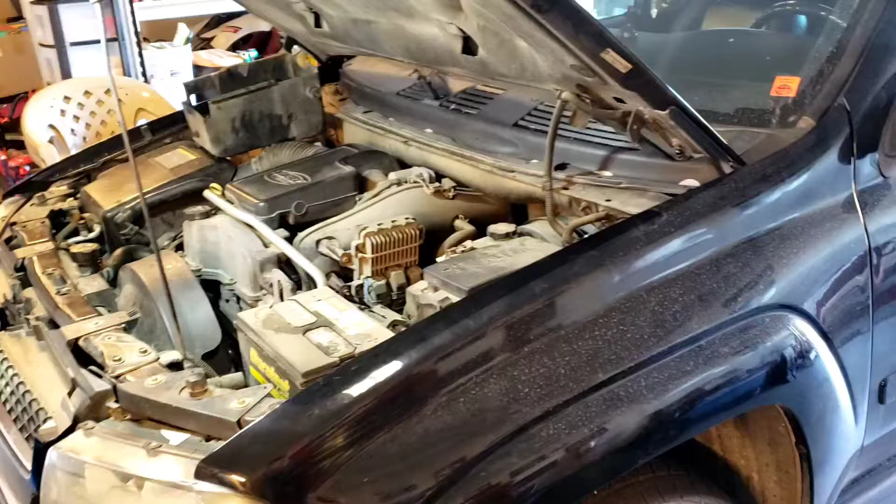Working on a 2007 Chevy Trailblazer with the 4.2 engine. Issues with this one, it has a really weak crank. I believe it's due to the battery. Weak battery. So we're going to do some real quick checks on it and show you what I check for. Make sure the charging system's working correctly.

But I'm going to try to start it here. I already started it once, but if it sits overnight, it'll barely even start, if it'll even start. So you can hear it's very weak right there. If you look, the charging voltage is really high right now because the battery is weak. So I'm gonna go ahead and shut it off.

But if you heard it there, I don't know if the video captured it, it barely cranked. And it's not that cold in here. It's probably like 40, 50 degrees in this garage. But when it gets down to single digits or teens, this thing won't even crank. It'll just click.

So what I want to check for is to make sure the alternator is working correctly, charging. There's no parasitic draw on the system. Check the battery, battery load test it. It looks like it's a battery, but I'm just going to show some of the stuff that I check for so we don't throw parts at the job, and we'll go from there. We'll try to start it one more time after it sits a little bit. You can try to listen to it again. So again, it's pretty weak.

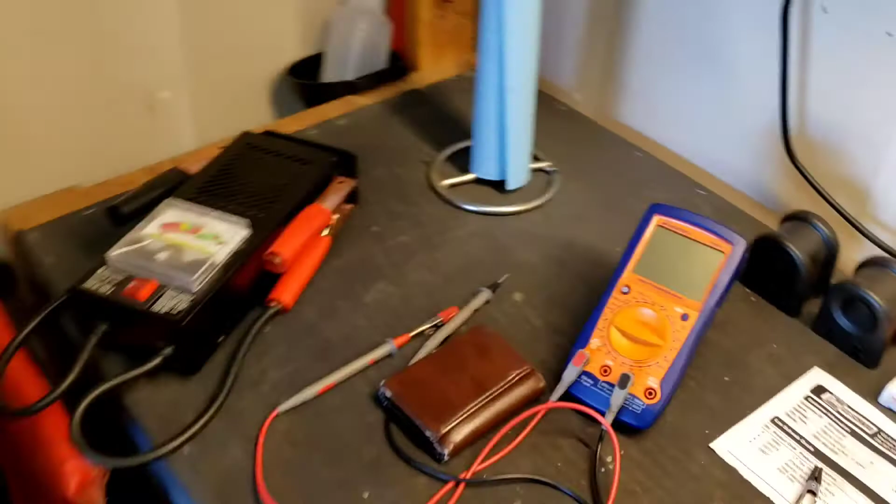So now what I'm going to do is hook up an oscilloscope. The reason I'm using an oscilloscope is so I can hook my amp clamp up and read amperage. You don't need to do all this, but depending on what kind of fault you have or charging system you have, you may want to do that. But you can also use just a regular DMM, digital multimeter. But we're going to hook up the oscilloscope and do some checks.

So I got my leads, battery positive, battery negative. There's a little corrosion on those connections, so I cleaned all that up to get a good reading. So you can see the waveforms all over. Why was that all over? Because it was running and then I turned it off and modules were turning off there. So right now everything's off. Still a little bit all over because modules are turning off.

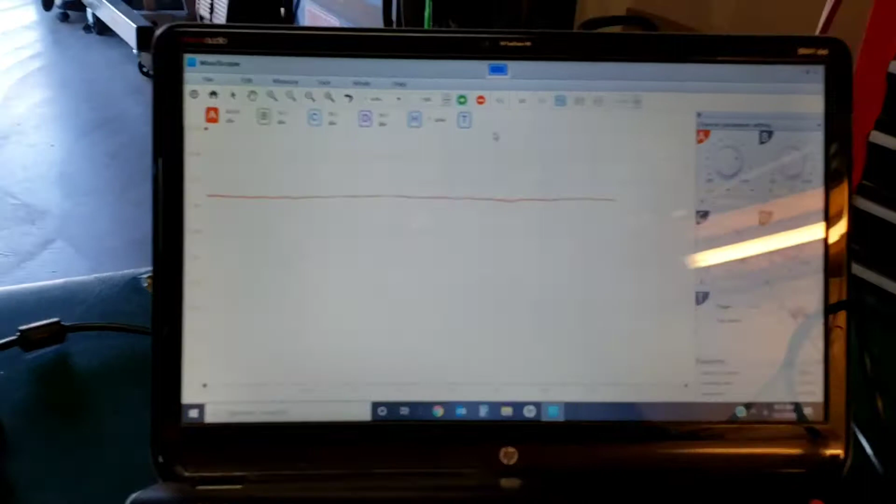But if I bring my cursor down and put it right on there, I got 9.8 volts, 9.810 volts roughly. That's very weak, right? That's why it barely starts. I'm surprised it even starts. It's supposed to be 12.6 volts because there's 6 cells at 2.1 volts apiece. 2.1 times 6 is 12.6. That's a fully charged battery.

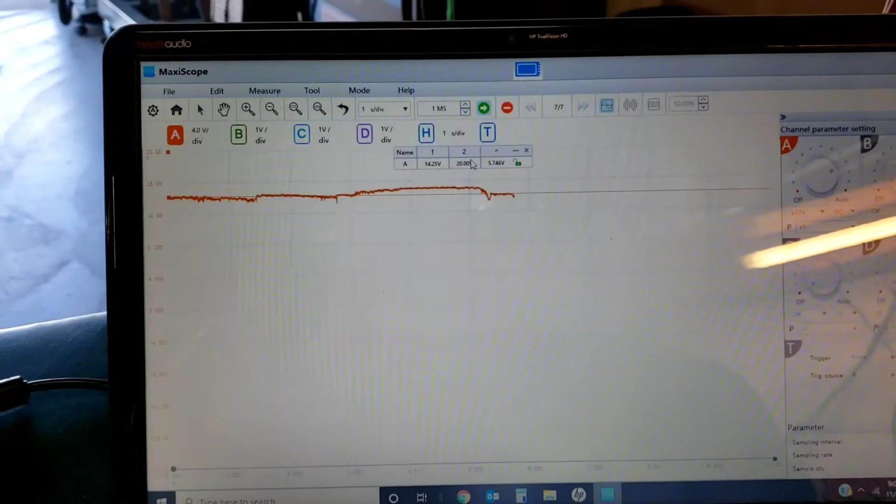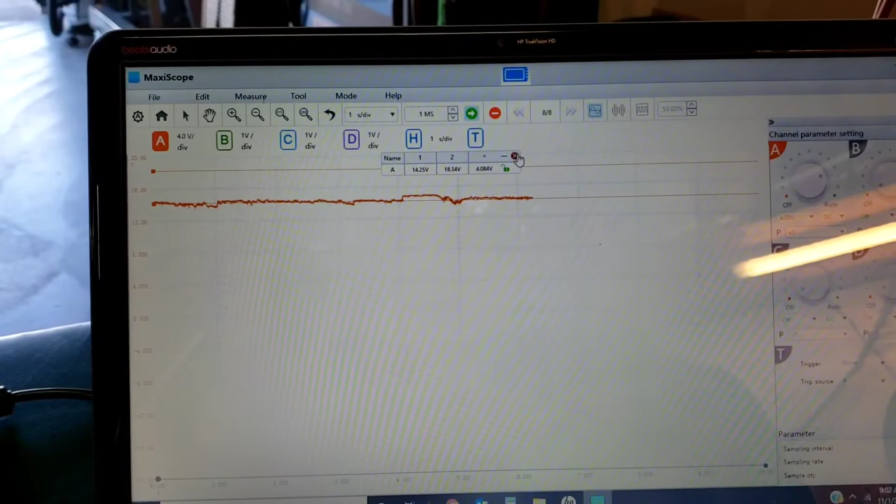So now what I'm going to do is go ahead and start it and read the alternator output. Hopefully it starts again. So it's running. You see the alternator, we're charging at roughly 14.25. It goes up and down. Hang on. Got the cursor out of there. 14.6.

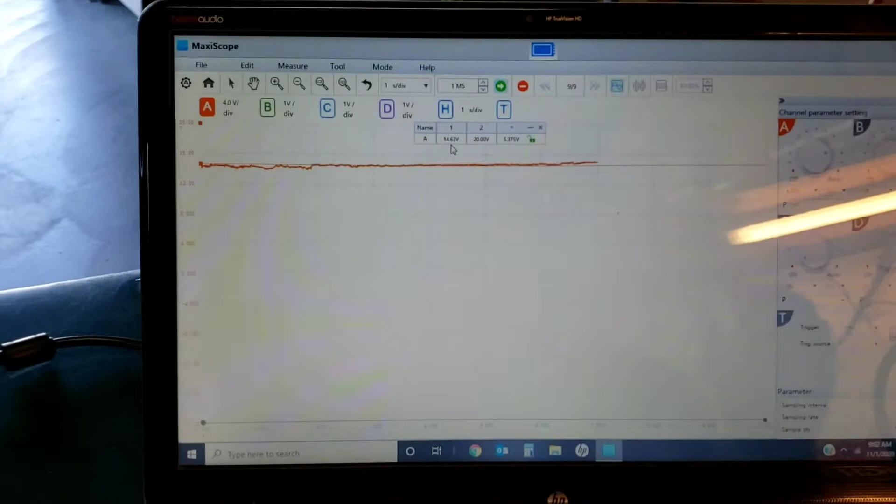There's a voltage regulator built in there. Obviously it's going to be higher voltage now because it's trying to get that battery back. It knows the battery's weak. There's also, on these Chevys, an amp clamp from the factory that's built around the cable to check amperage going through. So the alternator is charging. You can see it just went up there. If I pause this, go back a frame, 15.15 roughly. It's not overcharging, it's just that the battery's that weak.

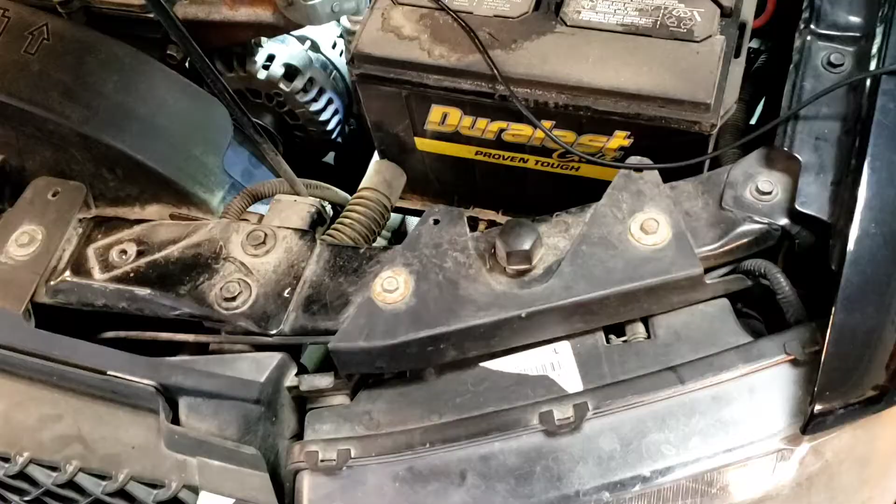So it's charging, the alternator's working correctly, but what we're going to do now is go right off of the alternator post that goes to the battery, and we'll do a check there and see if we get the same results. Alrighty, so I got the negative lead on the battery, the positive lead on the back of the alternator. So now I'm going to hit play on the scope again. Actually, it is already playing. So if you look now, I got, let me see where I'm at.

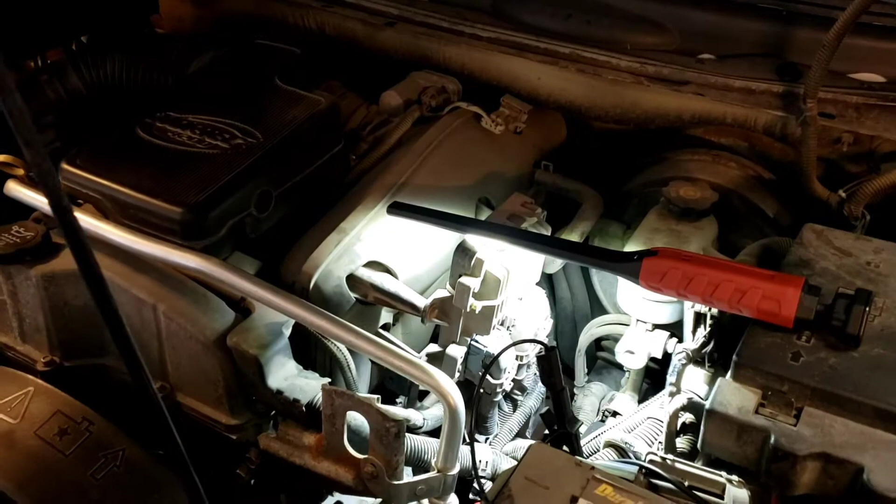12.4. It's got a little surface charge on it from running, but we had like 9.8, 10 volts earlier. I don't honestly think it was that weak, because if it was, it wouldn't even crank over at all. I just think I had a bad connection on these connectors here. Now I cleaned it up more, I got a better connection. But it's obviously still weak for that battery.

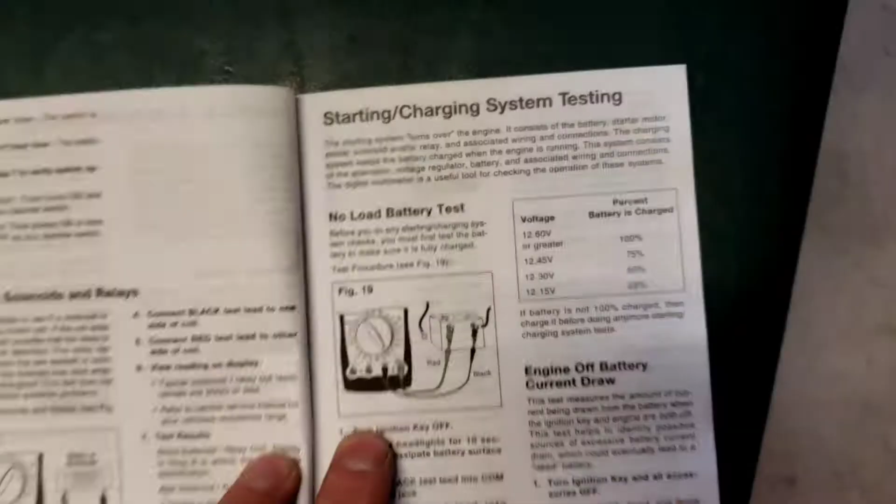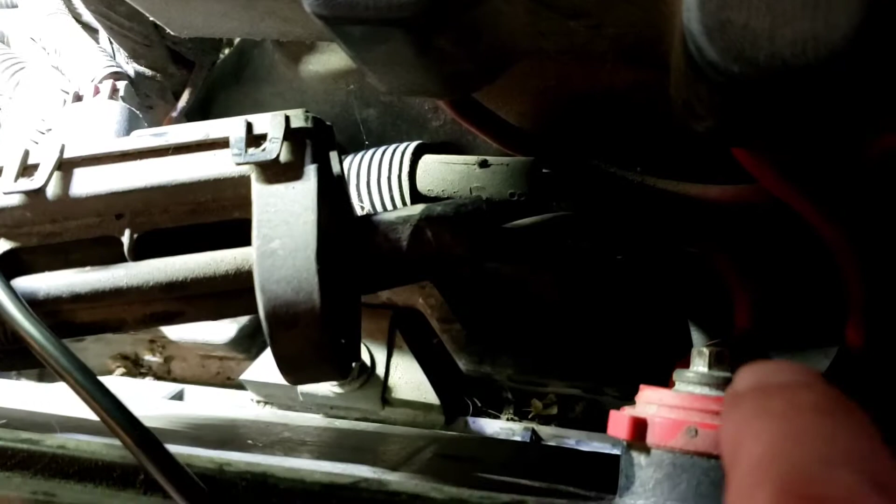If you look at this chart here, 12.6 or greater is 100%, 12.45, which is what we were just at now, 75%, 12.30 is 50%, 12.15 is 25%. So obviously if we had 9.8, 10 volts, it would have never started. That was just because I had a bad connection, because there's a bunch of corrosion on this connector there, and you can see it. So we'll clean those up when we do all this. But now we got a better connection, so that's more realistic.

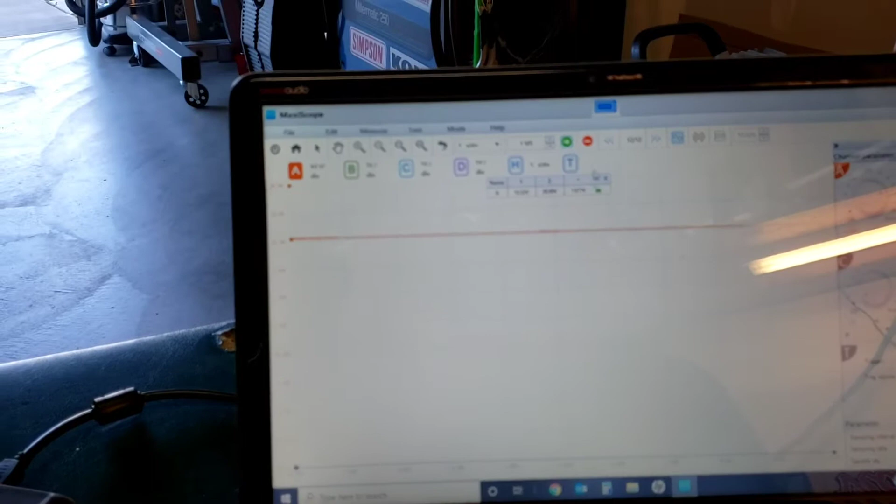So I just wanted to show that correction here, that before we had, you know, 12.3, 12.4 volts, obviously, so we could at least start the vehicle. But right now we have, yeah, 12.3. So obviously it is weak. So now we'll do the same test with it running and check the output voltage off the alternator. Let's go ahead and start it again.

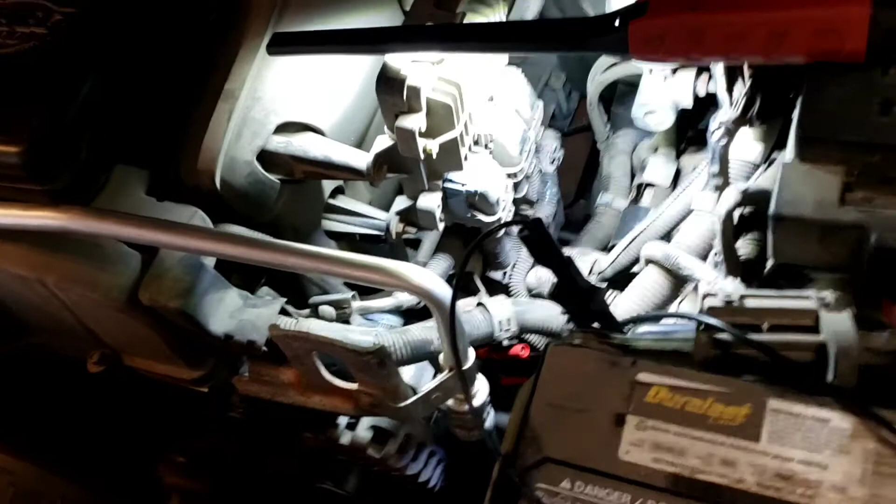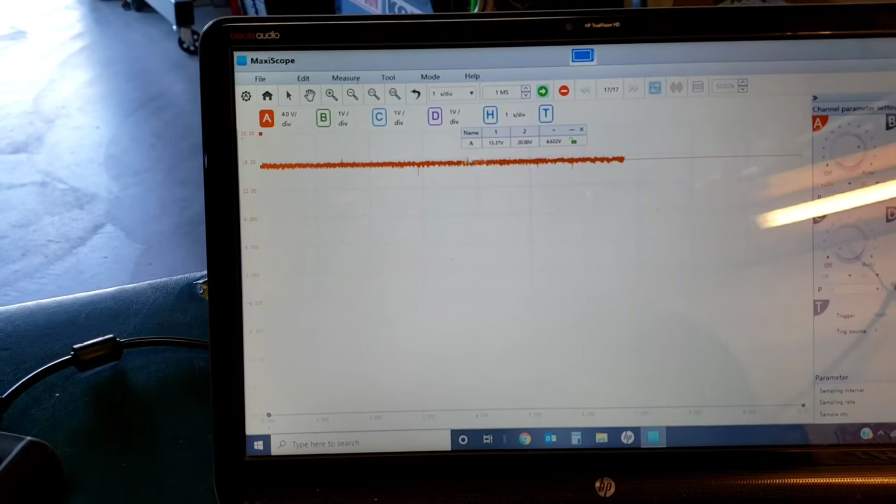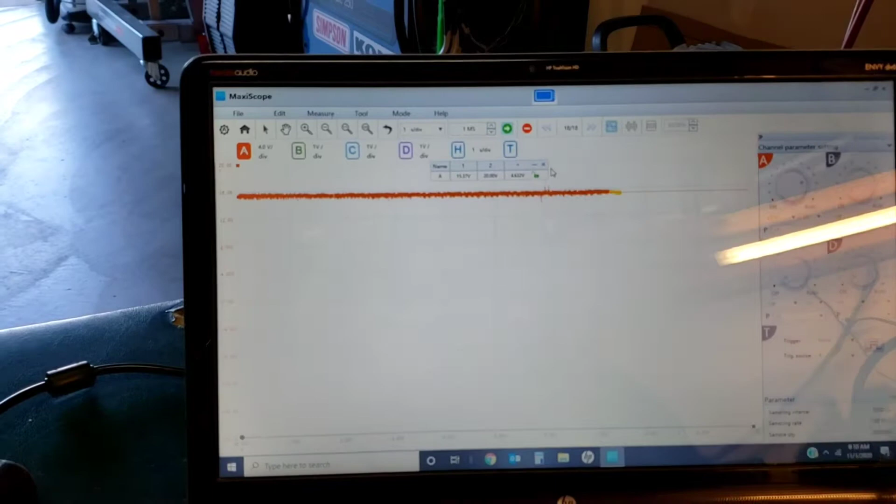Go back over to the scope. Negative and positive leads hooked up, negative to battery negative, positive to the positive post of the alternator. You can see there's some hash in there. We can put a low pass filter, not really worried about that right now, but it's charging. You put an average right down that hash, you're getting 15.3 volts, which is kind of what we got earlier, 14.8, 15.15. The reason is the battery's so weak, it was trying to charge it back up. So we know the alternator's working correctly.

So I went ahead and cleaned both those posts up some more with the wire brush. Everything's off, but now you can see it's actually reading correctly. I mean, the battery's weak, obviously, but if I put this cursor down here and line it up, we got 12. I just bumped it. Come on. Yeah, 12.17 roughly. Obviously the battery's getting pretty weak. Probably got a little bit of corrosion there too, but the battery's weak.

So now, we know the alternator's putting the correct voltage out. We know the battery is weak. We can put an amp clamp on here just to see the amperage, make sure that's reacting accordingly when you turn lights on and so forth. And then we can do a battery load check, and obviously we already know the battery's bad, but we can do some other checks. Depending on the charging system issues, this could help you identify some charging system faults.

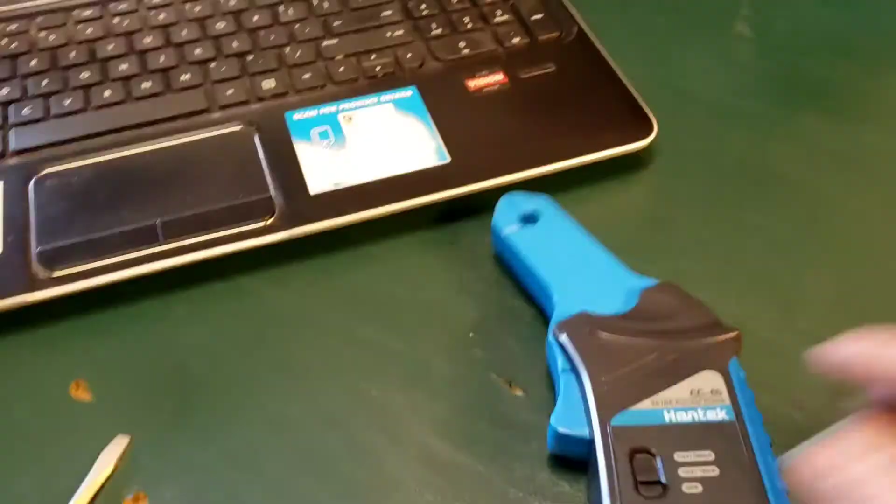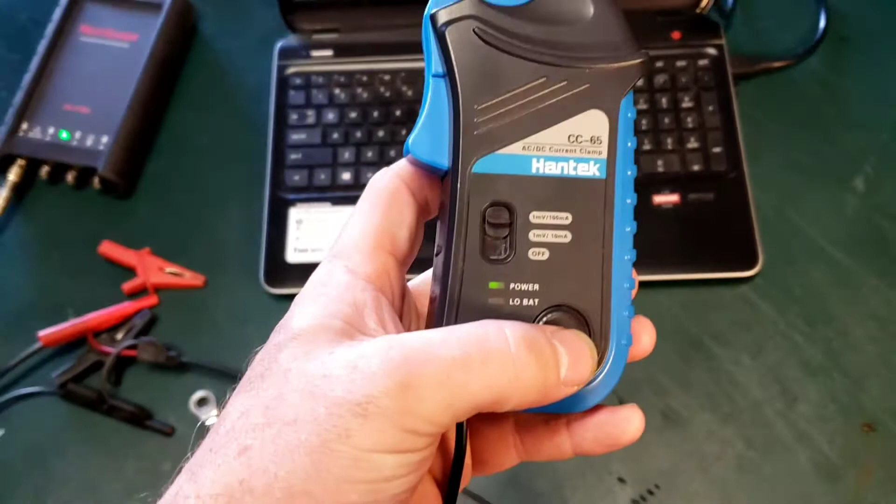Alrighty, so now we're going to hook up the amp clamp. We just got a low amp clamp here. I got to go into my oscilloscope settings and pick here. Where'd it go? I'm trying to film and click on this. That goes up to 20 amps. We'll see if that's enough. We'll go to 20 amps. Hit play. It's at 0. Take our amp clamp. We'll turn the switch on here. Like stuck. So we went to the high setting, and then I'm going to hit 0 on here. That'll zero that out on the screen.

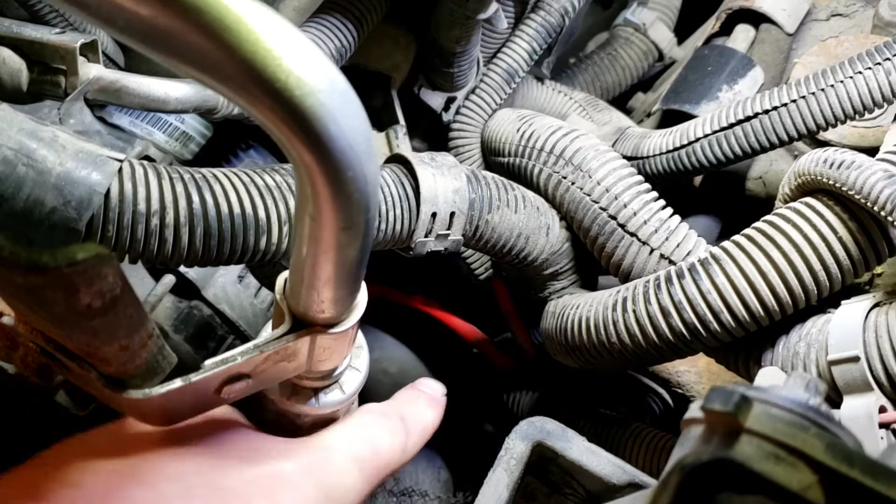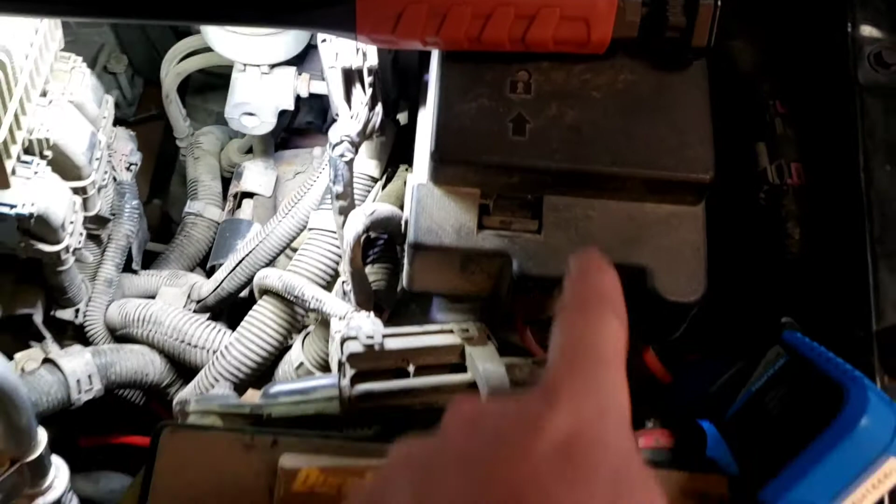And then we're going to take this amp clamp, go around that red wire down there, which is right from the alternator to the battery in the charging system, and check our amperage. All right, I put the amp clamp up here. I had a hard time getting it down there. I mean, I can move some wire sheathing and stuff, but I put it up here because what happens is the alternator charges the battery, tees off, and it powers the power distribution center or the fuse box. So it's going to be the same readings. So we're just going to go off that wire right there.

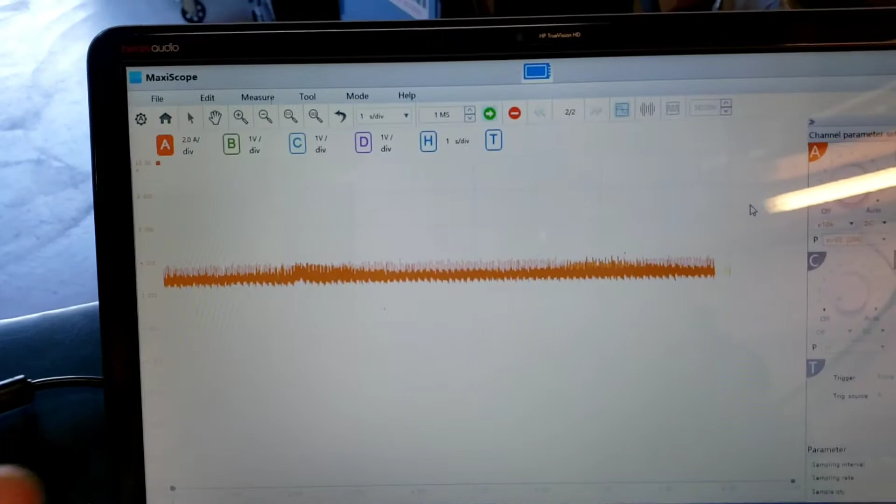So I have to flip my amp clamp around only because of the way the current flows. So if you look there now, I got average between 2 and 4, about 3 amps. It looks like powering it up. Now we're going to go ahead and turn some lights on.

I did get the clamp position right off the alternator. I had to move some stuff around, but I got it to work. I got the lights on, the heater on, the defrost on, the flashers on, put an electrical load on the system. And you can see our amperage is still not very high, it's like 3, goes up to 4 sometimes. And then you turn everything off, it shows only 1 amp.

for probe. There's a CC65, there's 2 of them, a 20 amp and a 65 amp. That's the small amp clamp I'm using right there. If you have a CC650, you go to 200 or 650. That's the bigger amp clamp, which I have right there. But I set it up here in the computer correctly. So I'm using the 20 amp. I don't think it's going to draw more than 20 amps in my scaling.

But on this, the first one is 1 millivolt is 100 milliamps. Second one's 1 millivolt is 10 milliamps. I need to set it to 1 millivolt 100 milliamps, or 1 millivolt 10 milliamps. But I had it set to this one up here. This has got to match that, basically, is what I'm trying to get at. So I had that set wrong. That's why the amperage was lower.

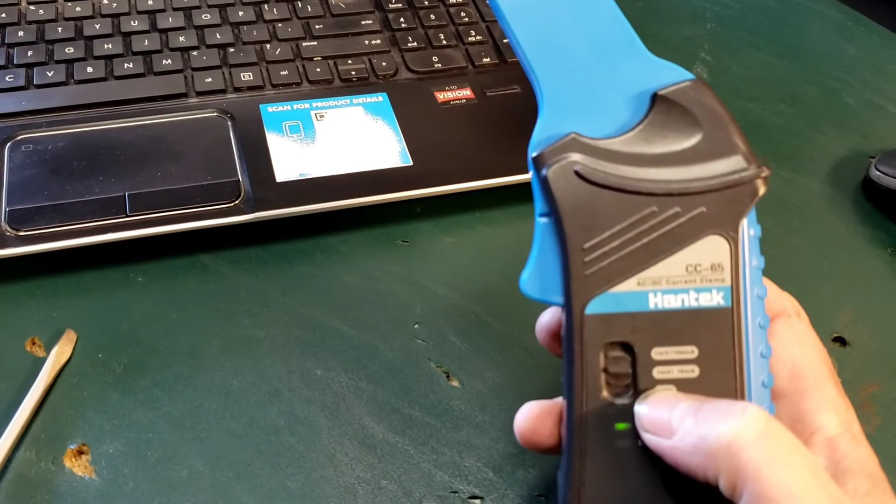Yeah, we could have done the math and all that, but now that I got it set right, I'm going to turn this off. Before I went 1, 2 all the way up, but I need to go 1 up. And then I'll zero it again like I did before. Now we'll have the accurate reading. So let me put it back on there and do the same test again. We'll go ahead and start it again.

Obviously this just proves if you have your equipment set up wrong, you could be chasing your tail. I almost went after an alternator there, because if it was really pushing that low of amps, I'd be like, well, that's why it's not charging the battery. But I had my equipment set up wrong, so always verify, whether using a multimeter, DMM, or whatever you want to call it, that everything's correct. It's the same thing with the battery posts. They were corroded. You always want to verify your readings because you'll be chasing your tail otherwise.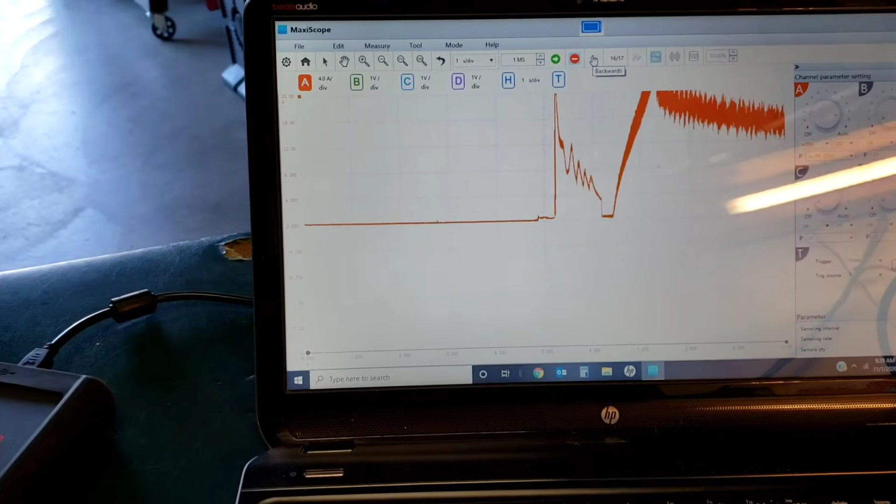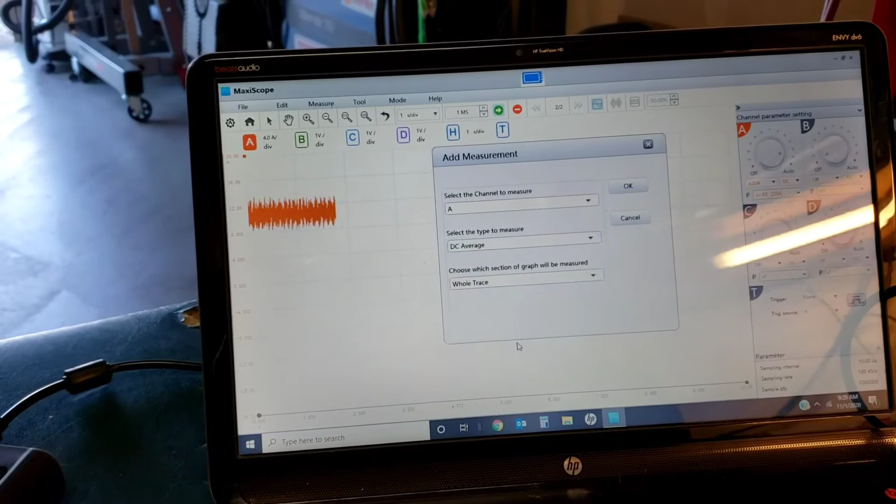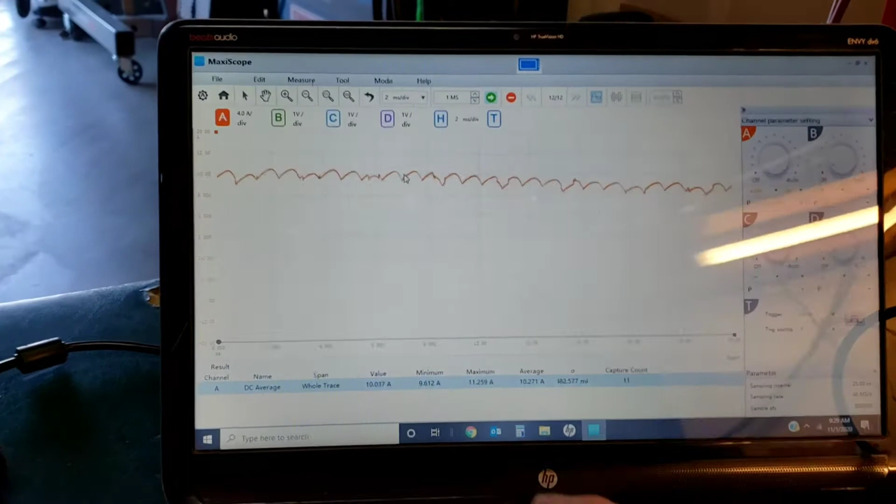So we got all that fixed up. Started again. It's starting better now because we've been running it quite a bit. Got the amp clamp on there. And let me pause it. So you look, it went way over to 20 amps there when I first started it, the spike, but now we're averaging 12 amps. I could put a measurement in here. Now let's take our time base, move it faster. So our average DC is 10 amps right now, right?

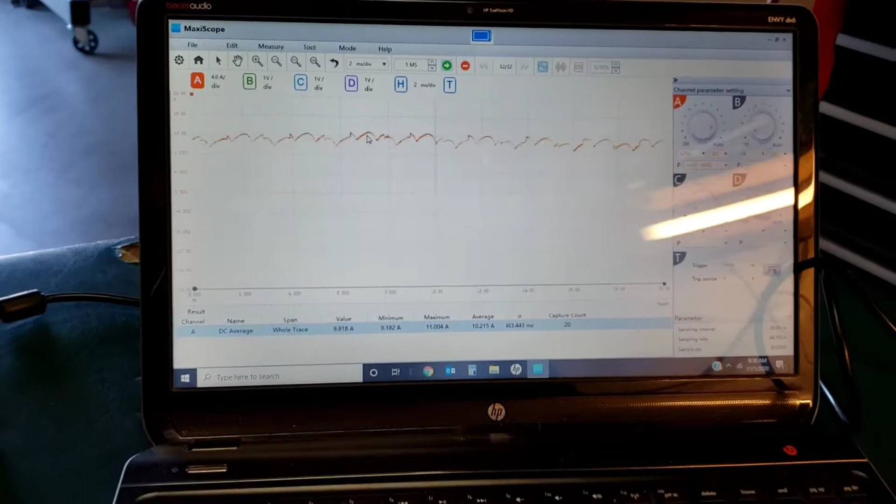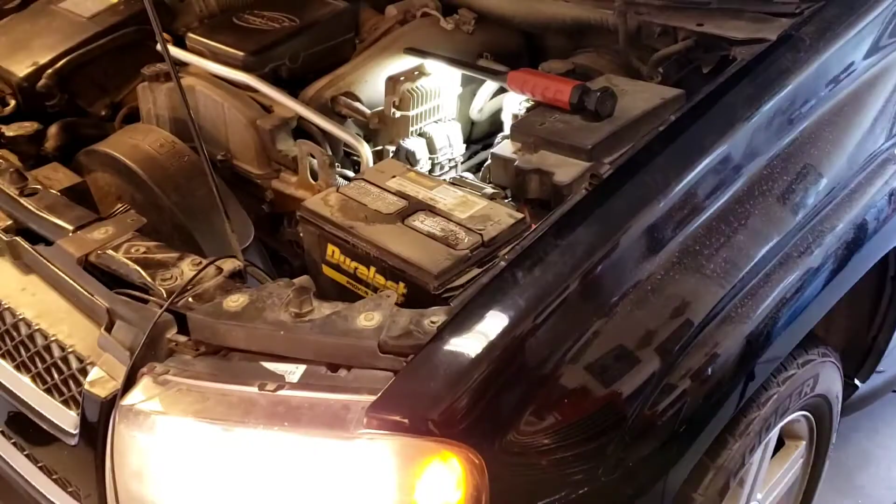So let me go ahead and turn the lights on and put a load on it. Right now, not much load on, we're drawing about 10 and a quarter amps, which is a lot better than I had before, just because I had my setup wrong. So that's normal. Now let's put a load on the system, and that should increase. So I just turned the lights on, and if you look there, the amperage went up. We're at 13 and a half, from 10 and a quarter to 13 and a half. Now we'll turn some more loads on and see where we're at. Now that's the average, obviously.

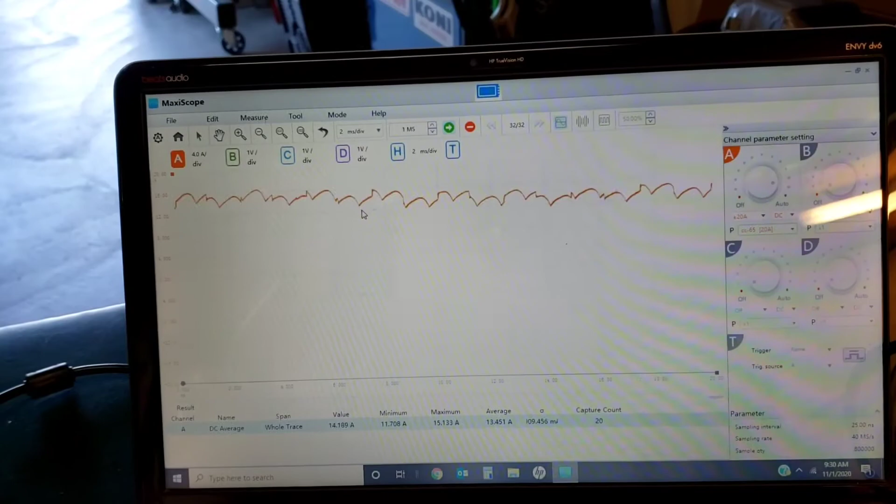So now I have the blower motor on, the flashers on, the rear defrost on, but I'm gonna have to rescale it now because this is telling me that it's going over my 20 amps that I have it set to. That's why it's not reading down there. So I'm gonna redo my amp clamp, put on the higher setting now. So I picked a higher setting, the 65. I'll go all the way up. Button's like sticking, I gotta fix that. There we go. And then I'll zero it.

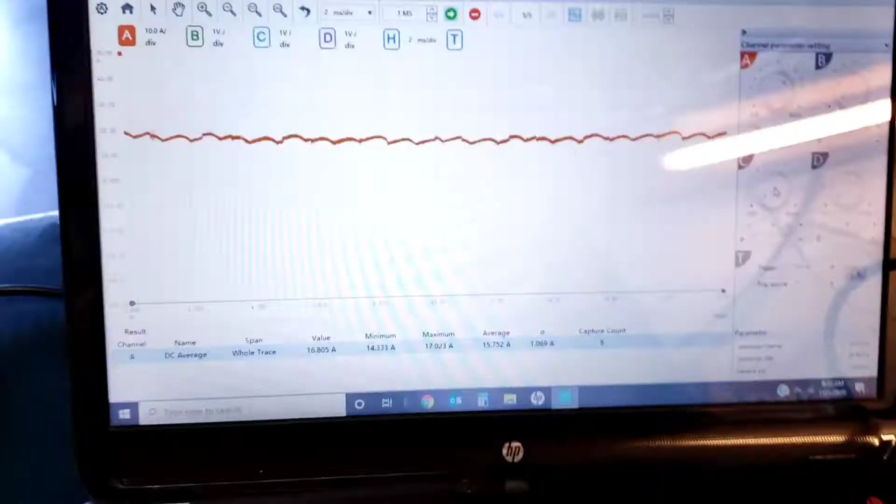Run a 2 millisecond per division time frame, so it's hard to see if it's zero. But if you zoom in, it is zeroed. I hook the amp clamp back up. Alright, amp clamp's hooked back up, and I'm on the higher scale. I got 65 amps on this side. But now we're drawing, once it focuses here, 17 amps, right? With the load on it.

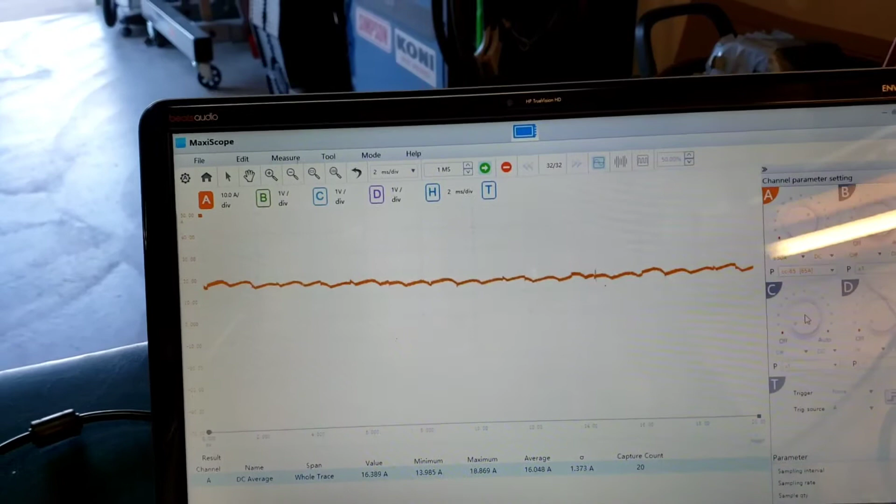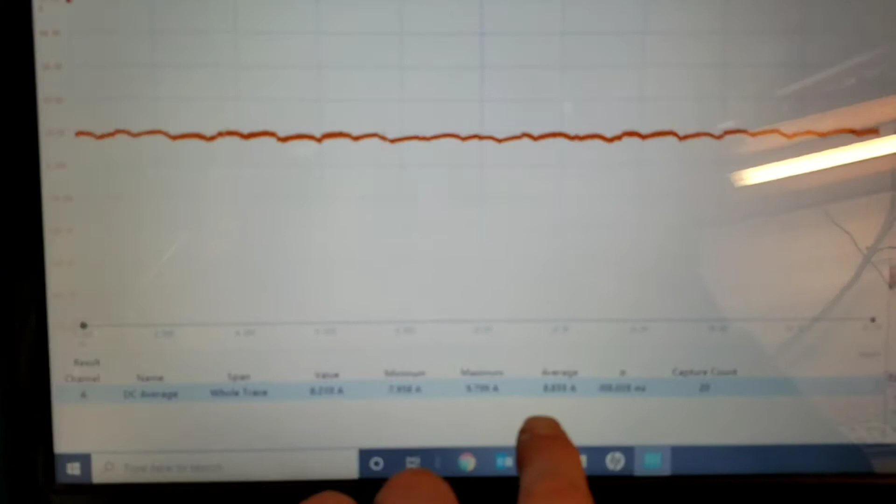Now let me turn everything back off again, let the engine continue to run. I turn the lights off, the flashers off, the heater off, and the defrost off. And now we're back to, once it focuses, about 9 amps. So obviously the demand is matching everything. So the alternator is working correctly. Obviously if you put more electrical demands on it, the more amperage it'll be. So that all checks good.

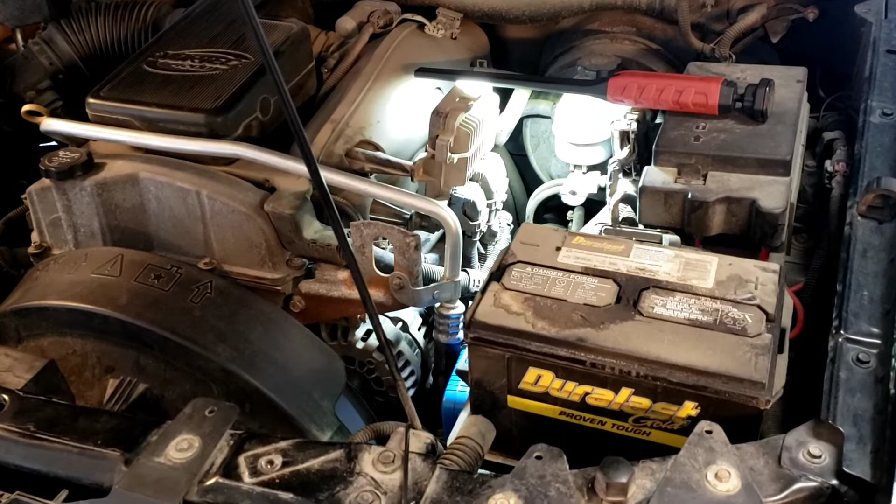So what I want to do now is, I know the alternator voltage and amperage is good. That's putting out, so the alternator's good. The battery's weak. We know that. What I'm going to do now is 2 more tests. A parasitic draw test to make sure there's no draw on the system when it sits overnight, and then a battery load test, and then that'll be it.

So now I'm going to do a parasitic draw test. Doors are shut, the hood's open, but there's no light on this hood. And typically, the general data is no more than 100 milliamps for a parasitic draw. But most, if you go into the service manuals for vehicles, they say 30, 40, 50. I know, like Mopar for Jeeps anyways, it's no more than 30 milliamps of draw. Because if you have more than that, if you have an amp or half an amp, you can do the math and figure out how long it's going to take to kill your battery. So make sure there's no draw on the system.

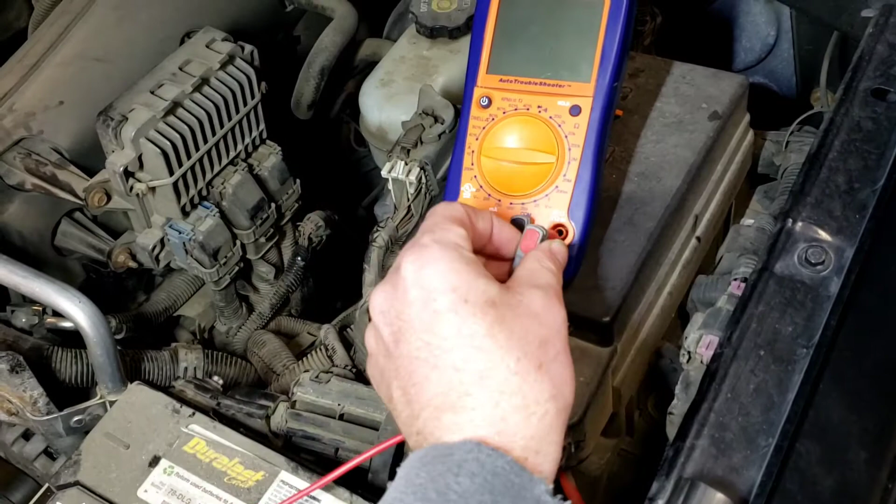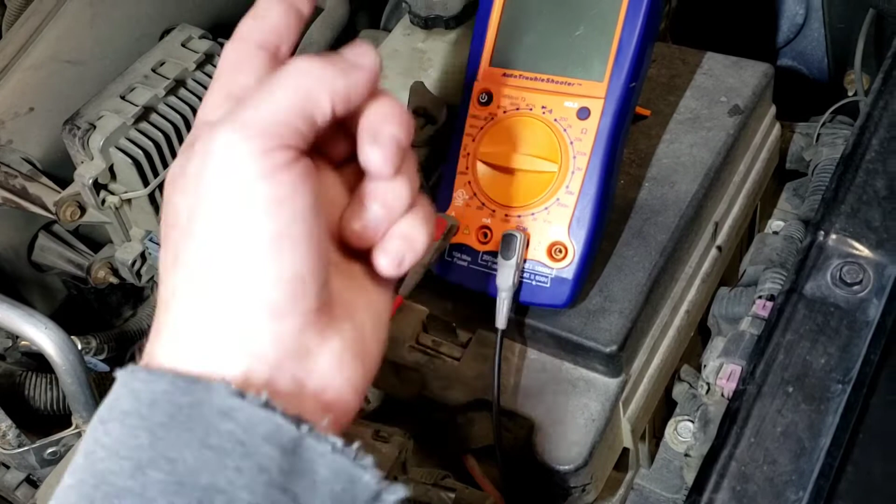So you can unhook the negative battery cable. You can go with the positive, it don't matter. Just go in series. Just got to make sure you take your lead here from your DMM. You got to put it in the A hole. I think you'll never forget that saying. So there's amps, and then there's milliamps. I'm going to go to amps right there because if it's more than those milliamps, 200 milliamps, it'll blow the fuse in here, which I've done. So I'm going to go to the 10 amp scale. Turn this thing on. Let me set this up and I'll show you how I set it up.

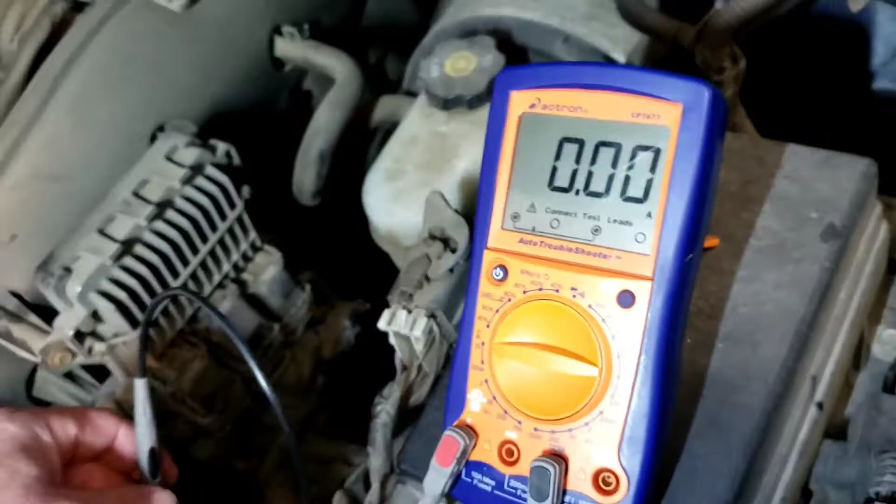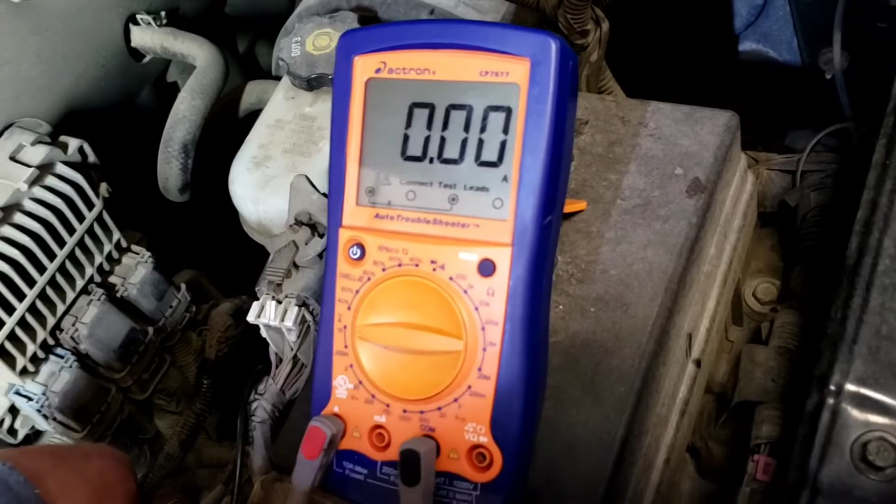Alright, so I got the positive. You could reverse the polarity, it'd just give you a negative symbol on there, which don't matter for what we're doing. But positive off the cable. This I'm going to stick in that hole right there, so we're in series. Watch the ammeter. Gotta get a good connection. So right now we're drawing... hang on, it just moved on me. Let me reset this up 1 sec. Alright, got it in there. We're drawing 3.2 amps. And it's going to go down. Still at 3 amps, but it'll draw down.

Why? It's like plugging the battery in. Modules are going to turn on and eventually they'll fall asleep and go dormant. 2.8 amps, 1 amp. It just keeps going down, 0.07, which is 70 milliamps right now if you do the math. So right there's 20 milliamps. So right now 0.02 amps is 20 milliamps. So we're good, but we're gonna let it sit here for 10-15 minutes or maybe even more. Probably should do 20-30, make sure nothing's coming alive. But right now this is within the specifications.

But if it stayed at 1, 2, 3 amps, that would be a problem. There'd be a parasitic draw. What would you do then if you had a draw? It's going up and down a little bit, but we're still within specs. Say you had a 1 amp draw, you'd go to the fuse box, pull a fuse at a time. So you pull number 1, it doesn't change. Number 2, it doesn't change. And you're down to the 5th fuse. You pull it, it changes. That's the circuit you'd want to identify and go after and see what's going on.

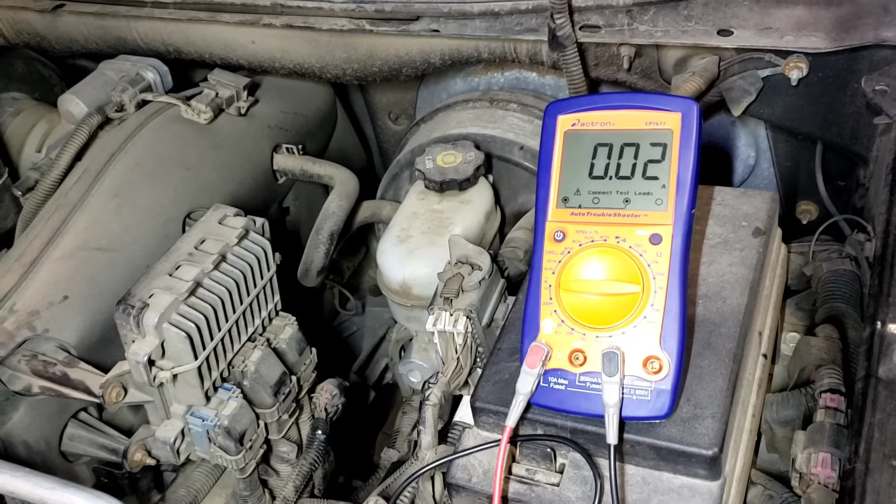But right now we're at 20 milliamps, so we'll let it sit here for a while and make sure we have no parasitic draw. Alright, it's been about 25-30 minutes. We're still at 20 milliamps. Sometimes it goes down to 10 milliamps, 0.01 to 0.02, which is 10 to 20 milliamps. So we do not have a parasitic draw. That is good. Alternator's good.

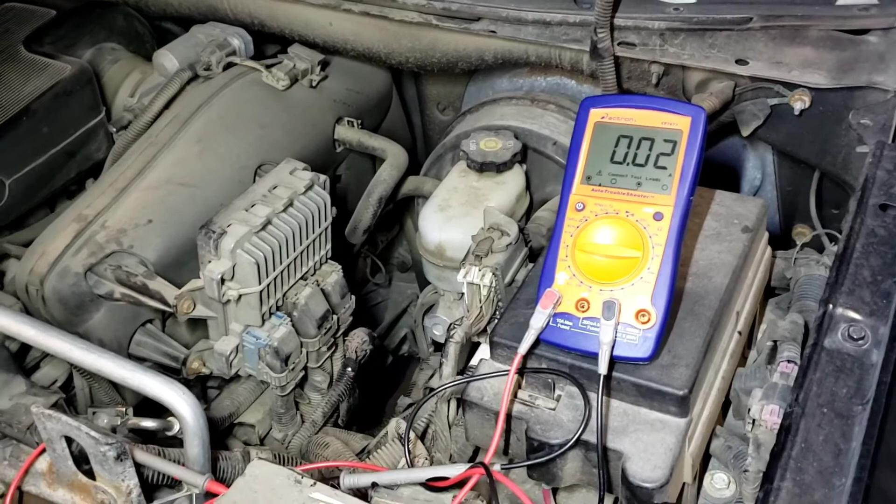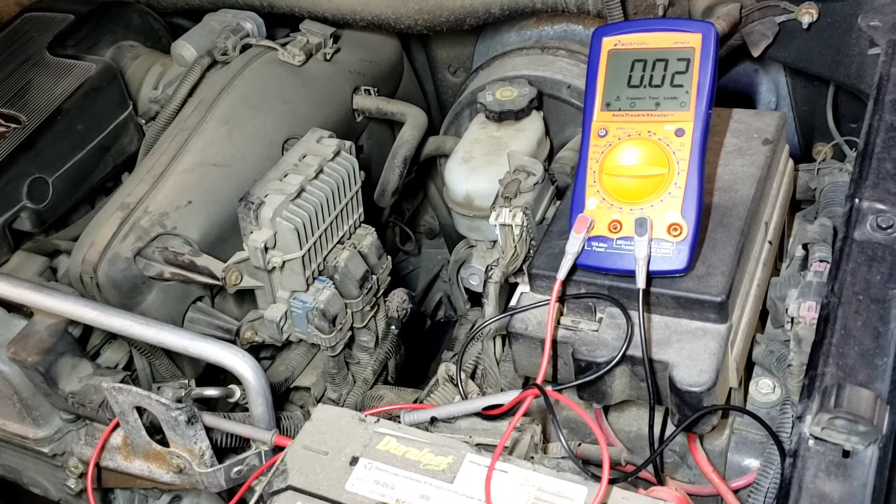Only thing we can do now is we can battery load test the battery, but we already know it's weak. We can do that anyway. So this thing needs a new battery. We'll put a new battery in, and that'll fix this issue with this car for hard starting. Alright, it's been running a while still, and you can see that the charging voltage is going down just a little bit because it is charging the battery up, because it knows that it's weak.

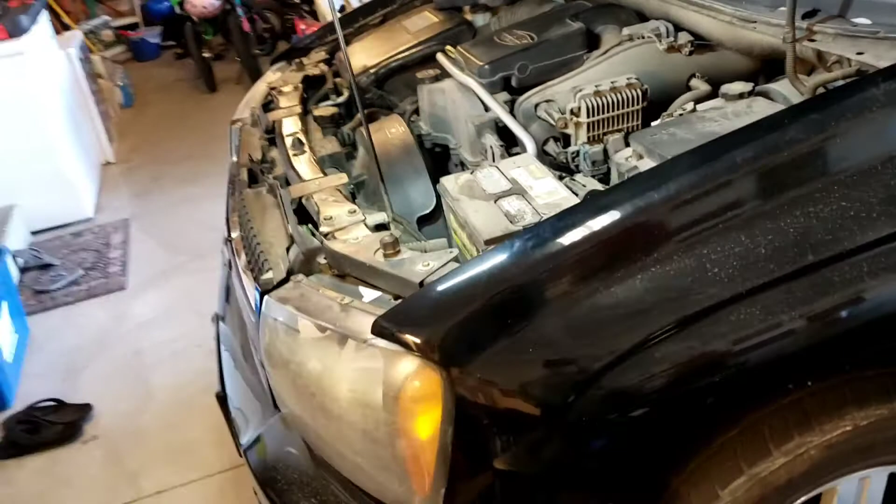But I did plug a scan tool in too. There's no codes in here. I mean, obviously we had the battery unplugged and plugged back in, but if there's anything, it would have just been low voltage codes. The alternator generator is working as advertised. No parasitic draw. The amperage is good on the alternator. All that stuff checks out.

Simply needs a battery. We didn't need to do all these tests, but it just proves, depending on what kind of issues you have for charging starting systems, especially charging systems, you could use these tools to identify different issues with your charging system.

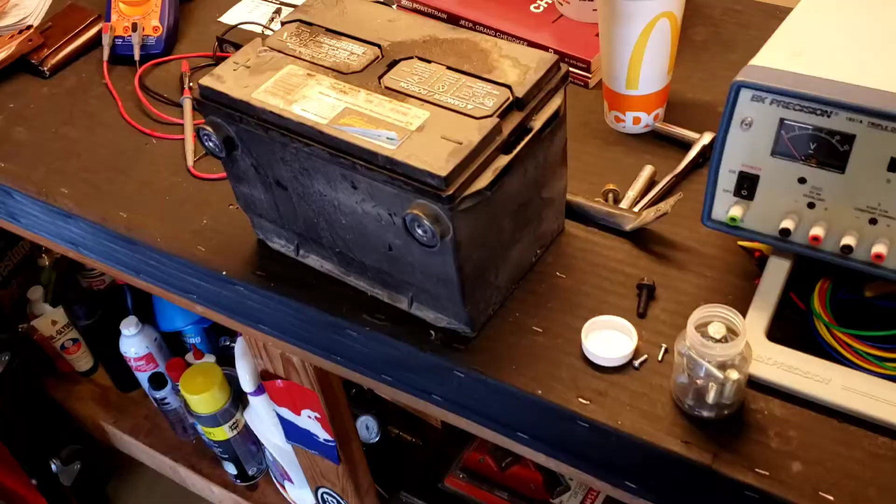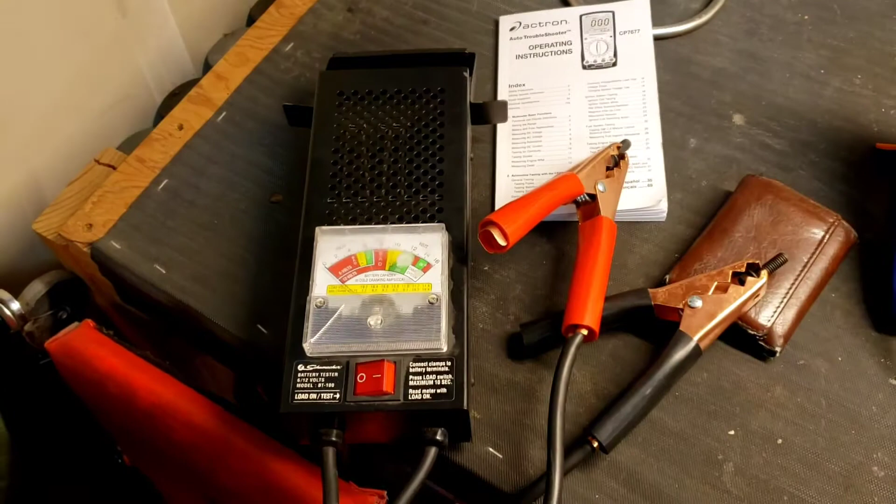Alrighty, so if you look at this battery, it's a Duralast Gold. The sticker's from September 2014, so it's a 6-year-old battery. They're not going to warranty it because they only have 2-year warranties on these Duralast Gold batteries. We can do a battery load check, so we're just going to hook the battery load tester up and check it, and I'll show you what our results are. I expect it to fail, obviously.

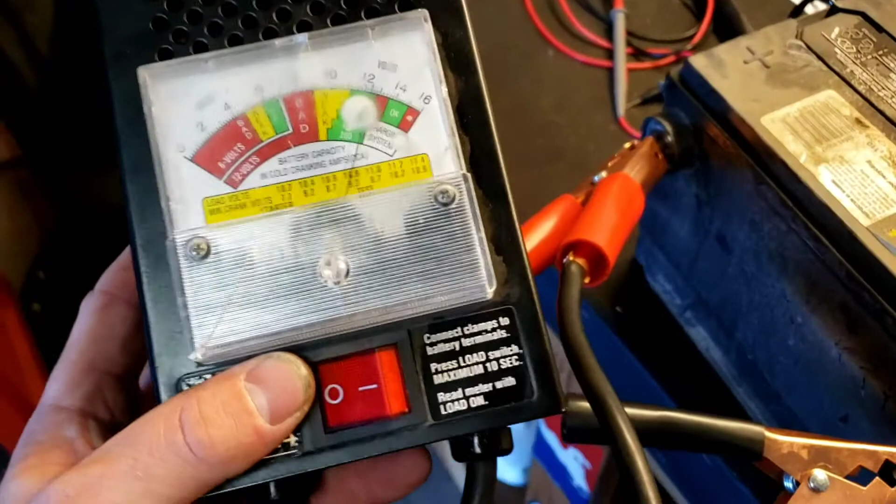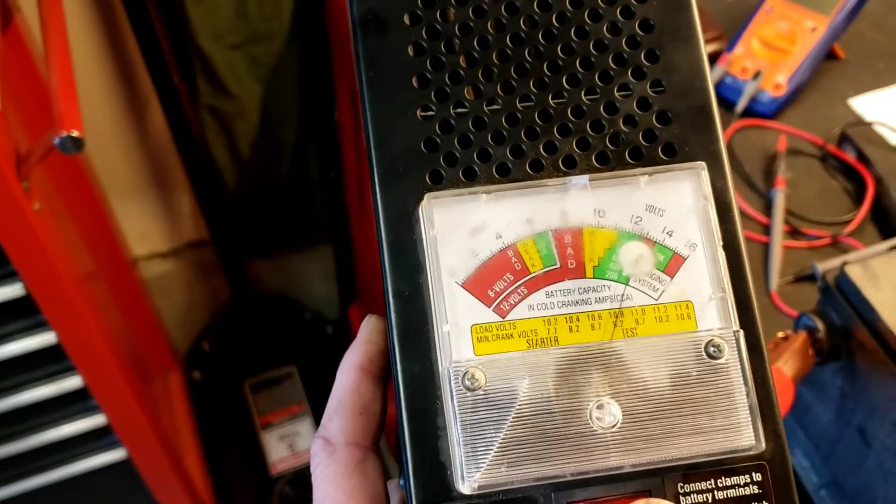Alright, I got it hooked up, positive to positive, negative to negative. Trying to film and do this, hang on. So I'm going to hold. Yeah, I'm trying to grab this here. Let me reposition my camera. Alright. Maybe I can hold it this way.

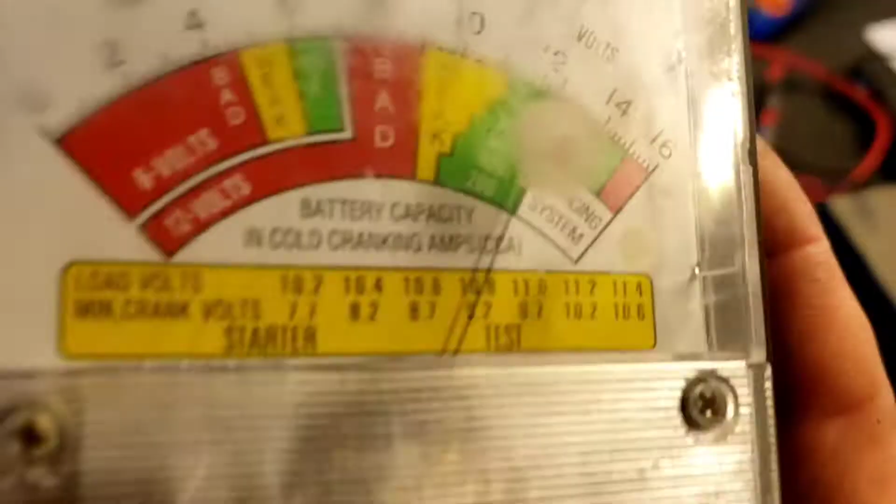Positive to positive, negative to negative. Maximum 10 seconds. So right now you can read the voltage. Yeah, 12.3, 12.4 probably. But it should stay in the green when we do this check. So I'm going to simply hold this. Look, it goes right to weak. Not too bad yet, but it went to weak.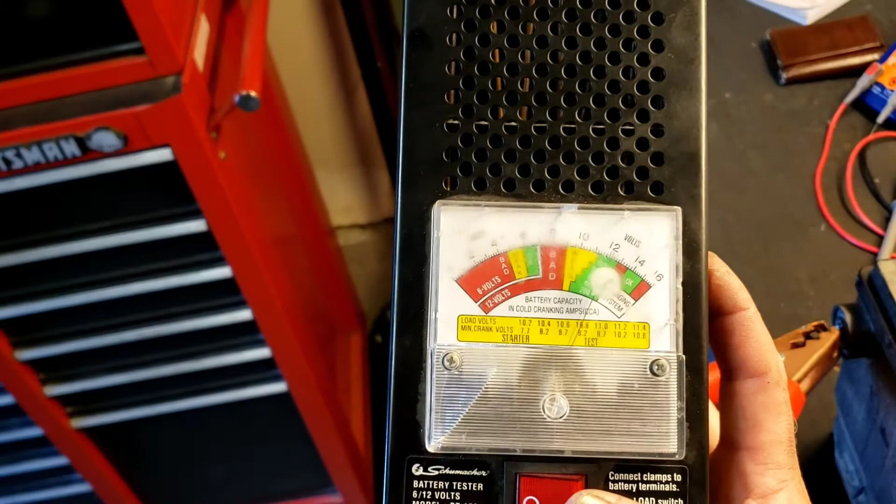A new battery will stay in the green. That's why. I mean, it ain't bad yet, but it's very, very weak. See that? It's going in the bad. So obviously, this thing needs a new battery, and then that'll fix this cranking issue for this 07 Chevy Trailblazer. So that is it for this vehicle.

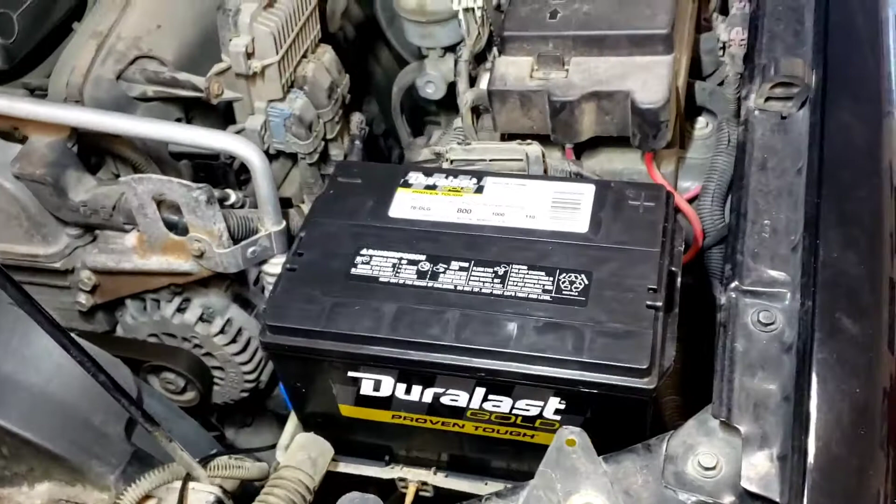Well, I know I said I was done, but I did get a new battery. This one's manufactured October of 20. I said earlier it's a 2-year warranty. They're actually 3-year warranties for these Golds. But either way, the other one was never under warranty. So we got the new one hooked up.

We'll go ahead and start it. We can check our amperage again. There's nothing we really need to check because you can already tell by starting it if you listen here. A lot quicker crank time there, so that's good. Got my amp clamp hooked up. No loads on the system.

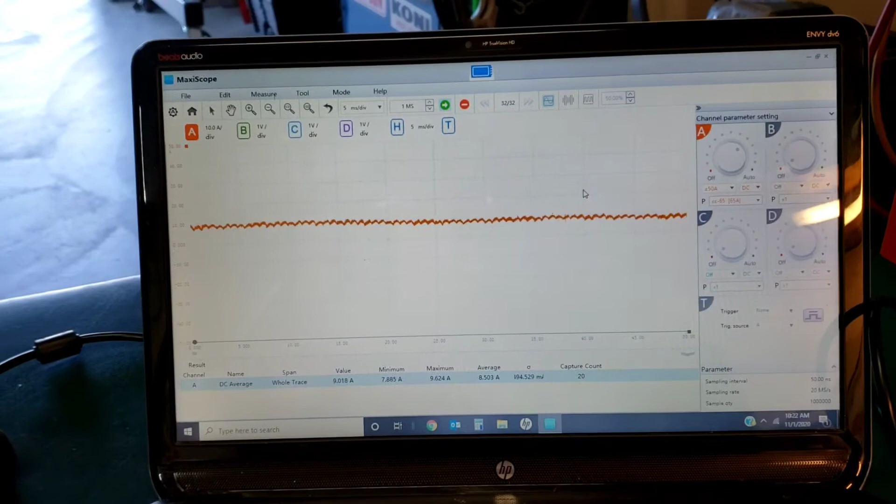About 9 amps there. It's leveling out. 8 1/4. It's a little bit less amperage because obviously it doesn't need to charge the battery as much because it's a good battery. 8, 9 amps. So again, we can turn the load on. We'll just turn the lights on this time.

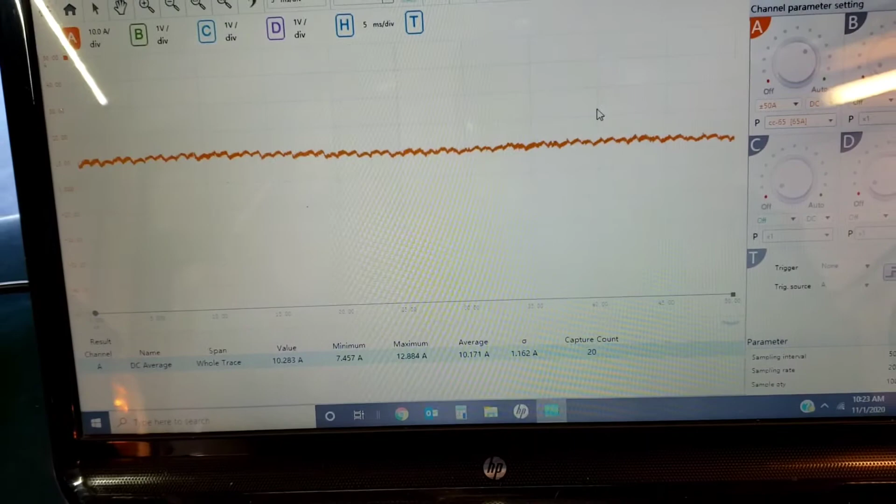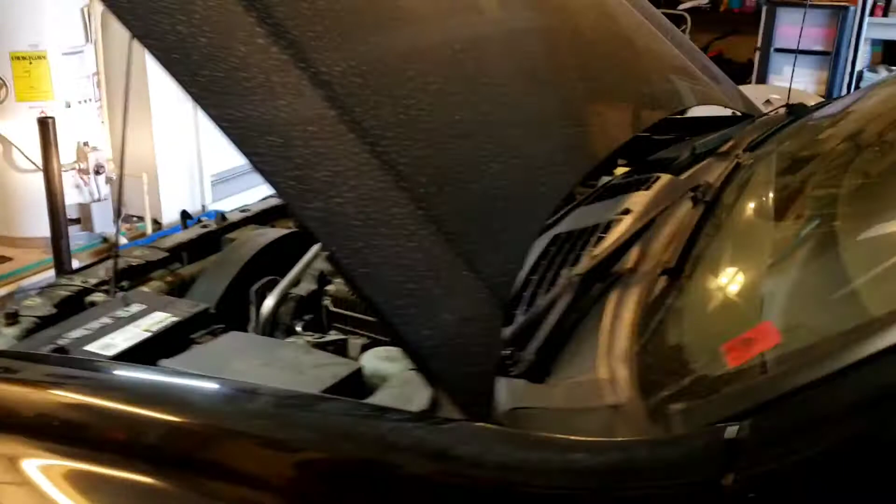You can see the amperage went up to 10 amps. It's going to equalize there. So that battery's good. Alternator's good. Obviously just needed a new battery. So now there's nothing else we really need to do with this vehicle. That is a fix for this vehicle.

What we can check is what they call AC ripple. That's just if you had some alternator issues. Let me get that set up and I'll show you guys that real quick. So for the AC ripple test, we know we don't have an alternator problem, but you could use this test as well to see if your alternator is good or bad. We know this vehicle's fixed, but for the AC ripple test, lead to battery negative, positive lead to the alternator. It's best to go off the alternator, not the battery.

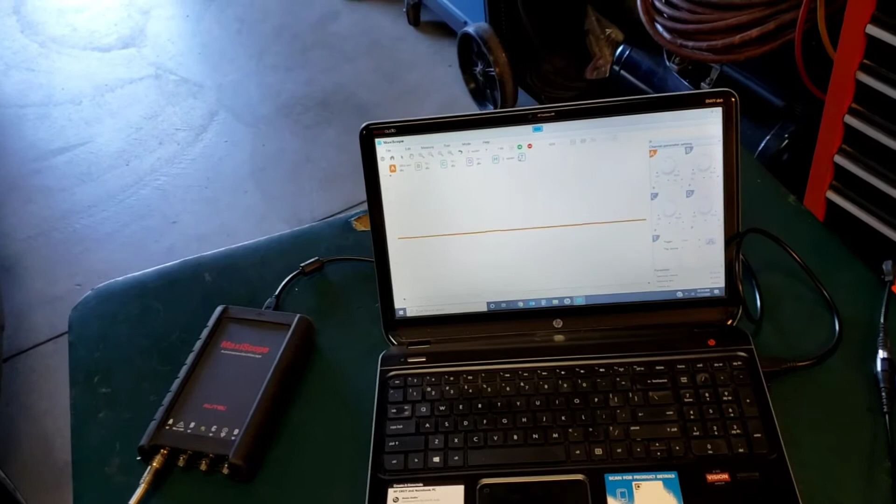Have my scope set up to AC, so it's AC coupled, and I'm on a 2 millisecond division scale. And I'm on a plus or minus 1 volt peak to peak reading there. What I'm looking for is no more than 300 millivolts of AC ripple at 2,000 RPMs, electrical loads on, lights, heater, defrost, and so forth.

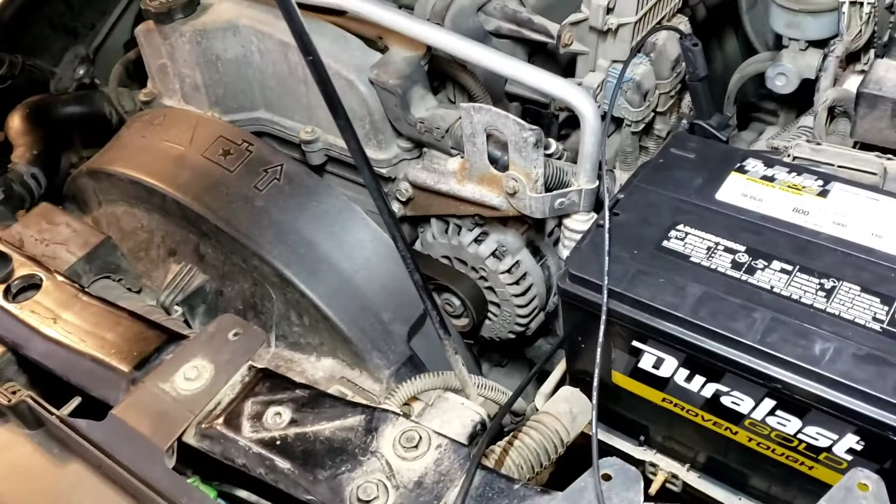Why? Because the alternator has a rectifier bridge made up of diodes. A diode is just a one-way valve. It creates AC current, and then it goes through the diode, and it won't let any AC current go back, so it'll make DC. Well, if you have one or a couple of diodes going bad, you'll have AC voltage being pumped through the whole system, which can flicker your lights. Anytime you have a 2-wire sensor, whether it's a vehicle speed sensor or ABS sensor, such as a wheel speed sensor, that can mess with the whole system.

This vehicle's good, but it's something I always check for. They do all these checks when you take it to a parts store. They don't have an oscilloscope. They're just plugging into a machine. But I've seen where people have taken alternators in and it says it's passed, but it's actually failed. They don't know actually what they're reading. They're just telling you if it passes or fails, what the machine tells you. Maybe some of them do, but they don't understand what is actually going on for the test. But this is showing what we're doing here.

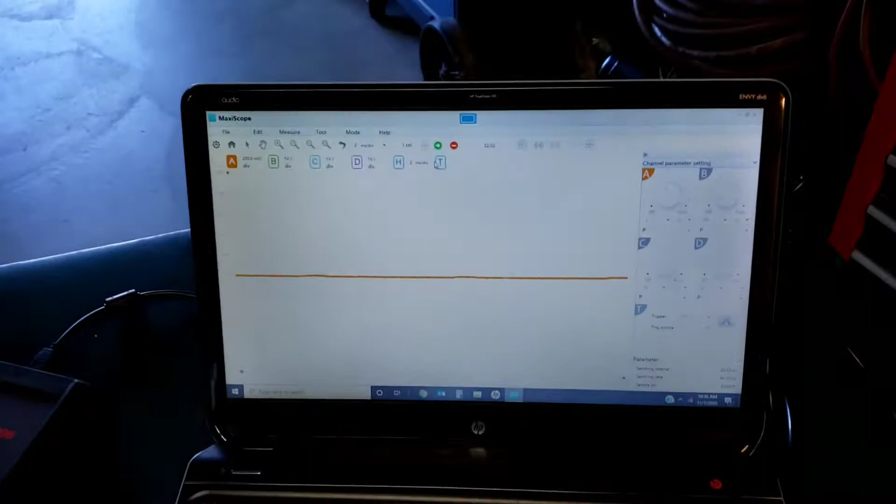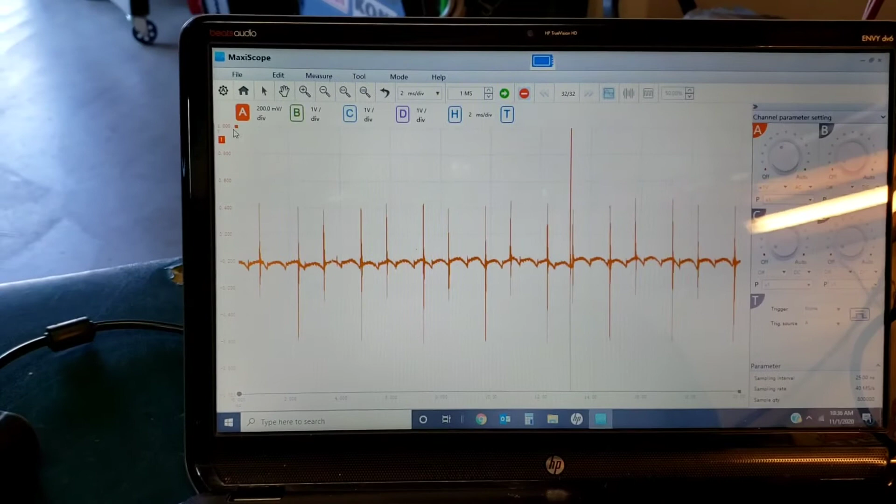So again, negative lead to battery negative, positive off the alternator. AC coupled. We're going to go ahead and start it and look for AC ripple. Starts so much better. So there's my AC ripple. I'm not worried about these peaks here. I'm not worried about that noise or hash. I'm going to pause it here and get my cursors down. Just bear with me.

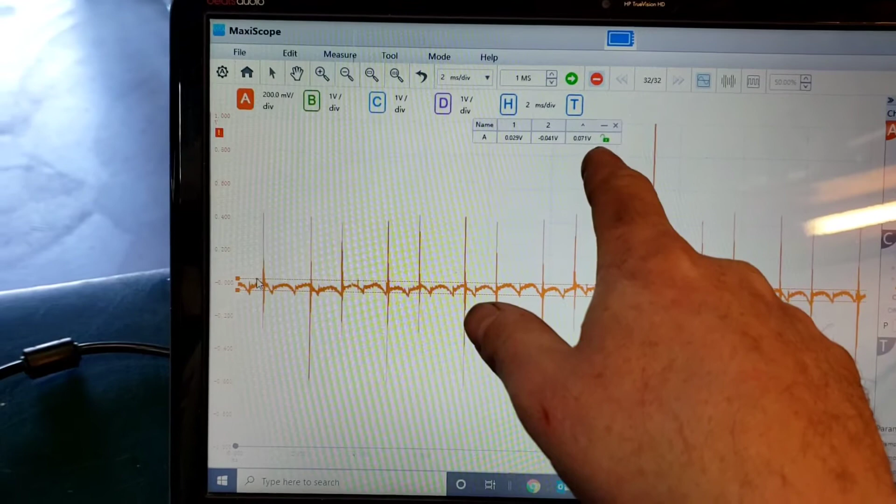I mean, that's rough there. Peak to peak, I'm right at 71 millivolts. 0.071 volts is just 71 millivolts. We say no more than 300, so obviously this is good. The real test would be to rev it up. So I'm going to go ahead and rev it up and check it from there.

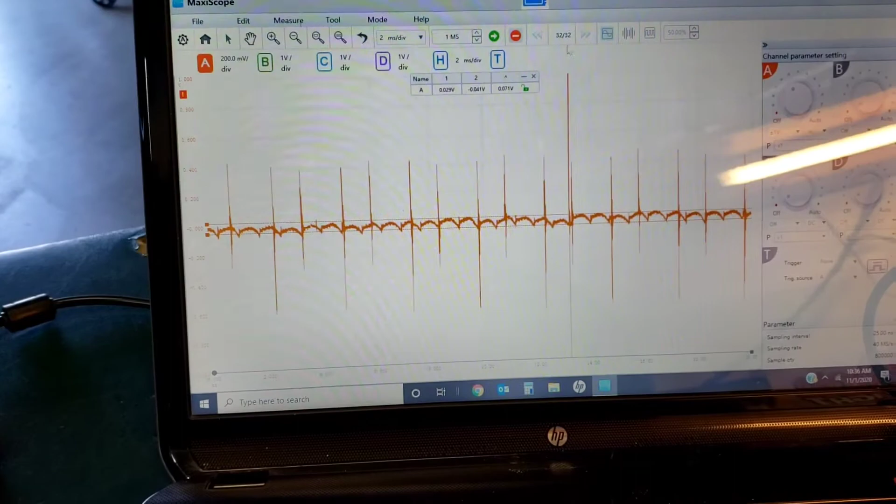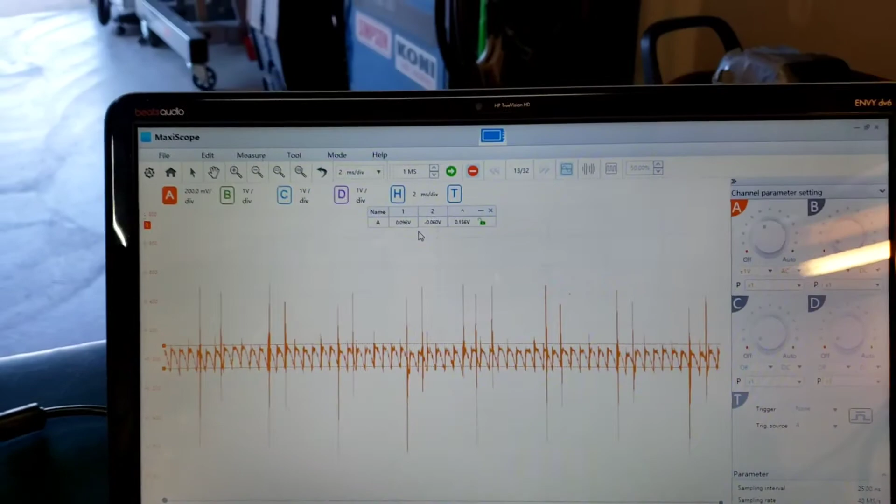So I got the lights on, heater on, defrost on, and I revved it to 2,000. You can see it's revved to 2,000 because the periods are a lot closer together. But again, peak to peak, we're only at 156 millivolts. 0.156 volts is 156 millivolts. So first cursor is that, second cursor is that. 0.096, 0.060, you do the math, you get 156 millivolts. So with the load on the system, 2,000 RPMs, we're only at half the maximum. So this alternator for the AC ripple is good.

Nothing wrong with the alternator, obviously. We didn't need to do all these tests, but they're tests that prove, or you can use them to troubleshoot different charging system issues. Obviously, this thing just needed a new battery. It shows you pretty in-depth methods of making sure everything else is good. Because the last thing you'd want to do is replace the battery when you have a parasitic draw, a bad alternator, and so forth. So if you have a scope, you can do a lot of this in your own garage and figure out what's going on. So that is it for this video. This vehicle is good to go now.